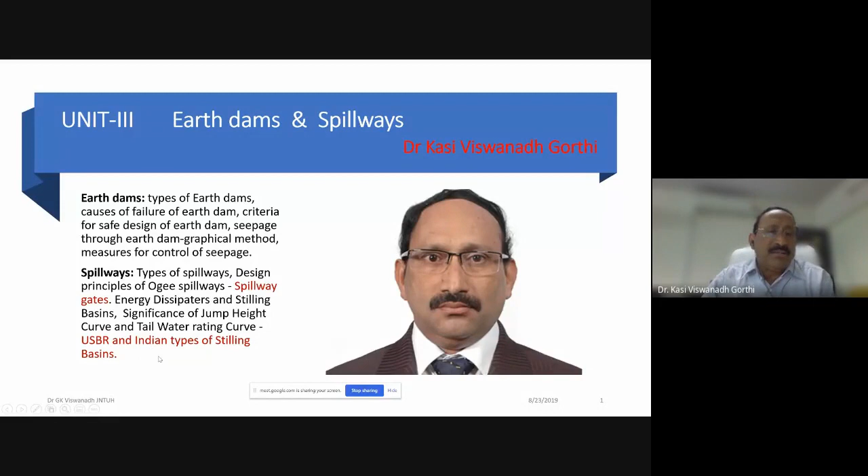So today's class, we will be concentrating on stilling basins, two types: Indian type stilling basin and USBR stilling basin, followed by spillway gates.

What is this stilling basin? It is a structure in which energy dissipation action is confined. This will be provided at the downstream portion of the spillway, may be extended for certain length. The phenomenon of hydraulic jump is basically used for dissipating the energy. It may be called hydraulic jump type stilling basin.

We may use certain auxiliary devices also, so as to contain the whole process of energy dissipation, confining to the total length of the stilling basin. We may use auxiliary devices like chute blocks, baffles, and sills. So these will act as the additional measure for controlling the jumps.

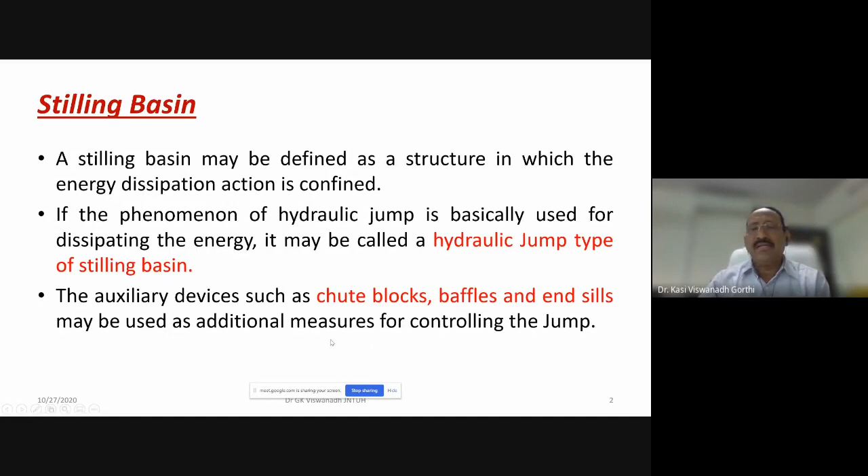Types of stilling basins: two varieties, USBR stilling basins and Indian standard stilling basins. Various types of stilling basins have been generalized for use in different types of works by various agencies. The design of these basins have been developed on the basis of long experience, also by conducting several model studies, keeping in view the protection obtained, consistent with economy also.

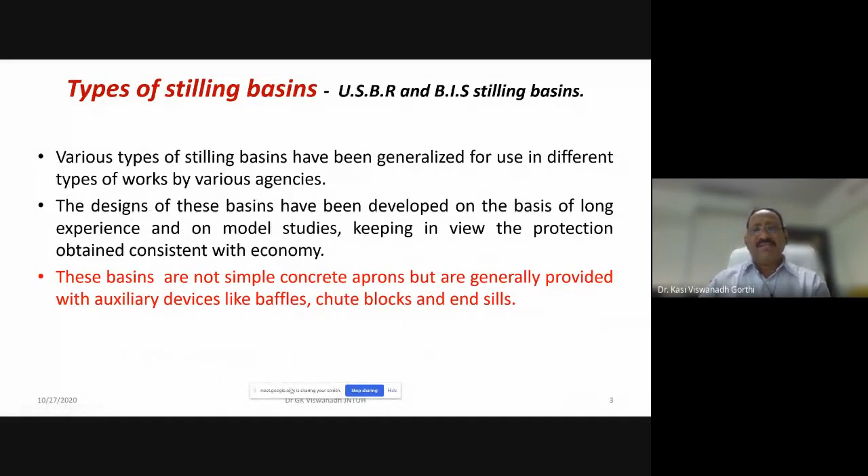These basins are not simple concrete aprons, but they are generally provided with certain auxiliary devices like chute blocks, baffles, and end sills. In the previous class, we have seen what are the chute blocks, what are the end sills, and what are the baffles which are provided on the apron at the downstream part of the spillway.

The USBR has standardized the stilling basins for different ranges of Froude numbers. Similarly, Bureau of Indian Standards has also standardized certain stilling basins for use under different conditions. Stilling basins 1 and 2 with a horizontal apron, and 3 and 4 with the sloping apron, have been standardized.

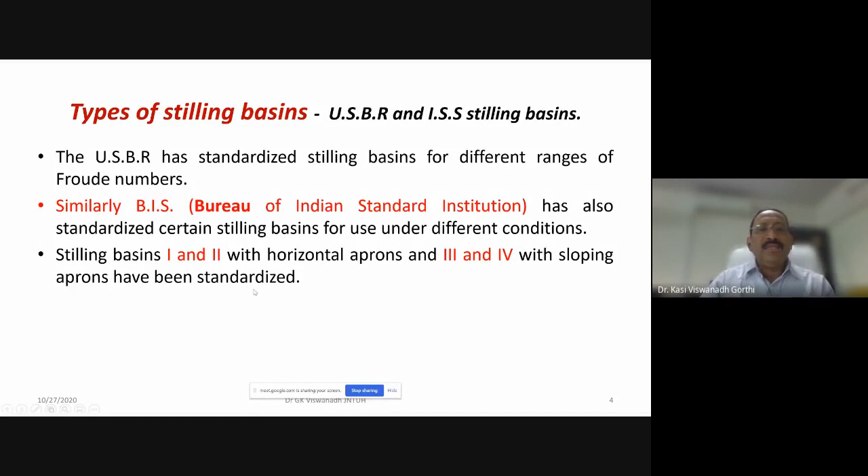Let us see both USBR and BIS stilling basins. Let us start with the USBR basins. USBR has standardized the stilling basin for different range of the Froude number.

Depending on the initial Froude number FR1 or F1, these have been finalized. USBR stilling basin 2 is recommended for use on large structures such as dam spillways and large canal structures, when the Froude number is greater than 4.5.

The length of the basin depends upon the Froude number, given here in the table. For Froude number 4, the length of the basin will be about 3.6 times the sequent depth in the hydraulic jump, Y2. Similarly for Froude number 6, it is 4 times Y2.

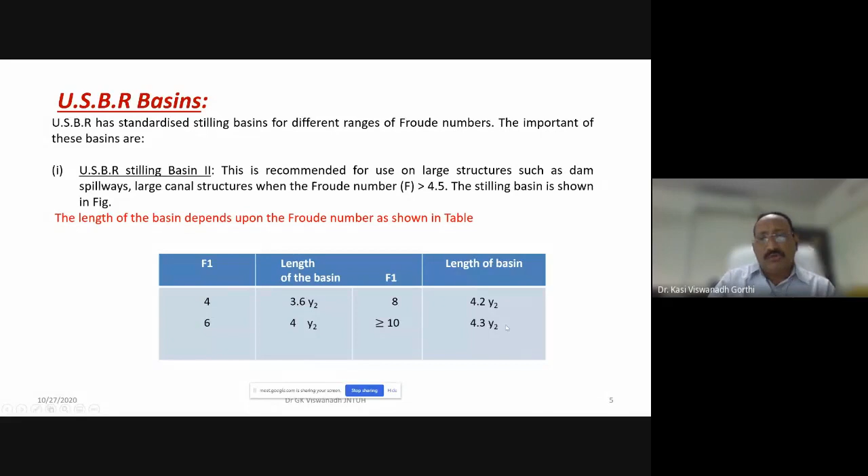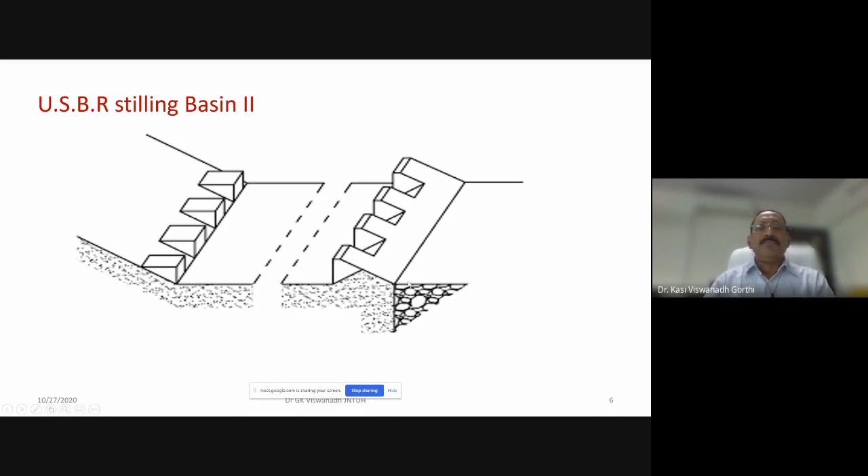For Froude number 8, it is 4.2 times Y2. And if the Froude number is greater than 10, 4.3 times Y2 would be the total length of the stilling basin. So this is the USBR stilling basin, extending for a length of 3.6 times the sequent depth to 4.3 times the sequent depth, depending on the initial Froude number.

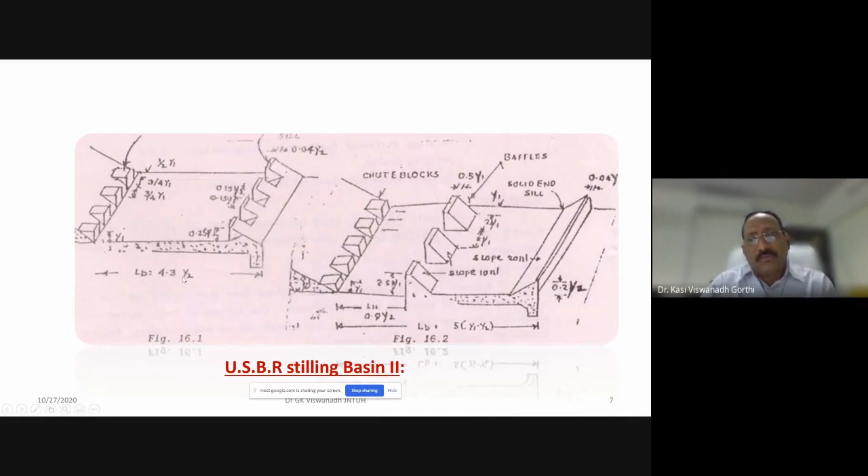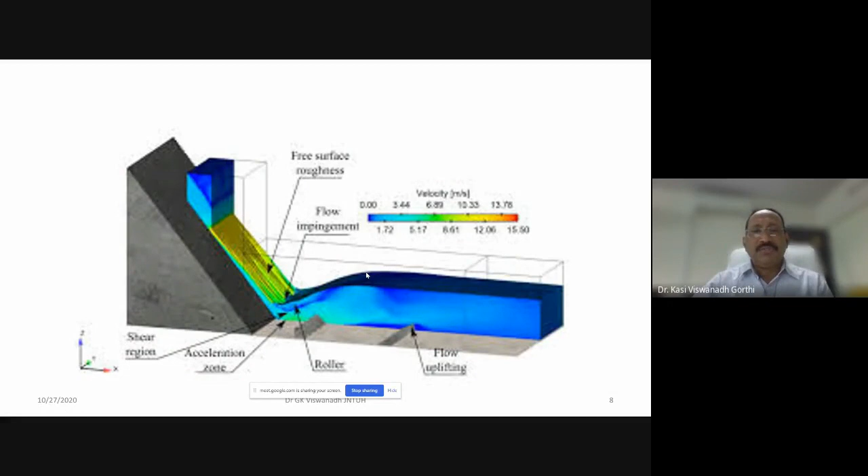So in this also you can see the total length of the stilling basin, 4.3 times Y2 for the stilling basin. This is USBR stilling basin 2. This figure also gives you how the length is finalized for the stilling basin.

USBR stilling basin 4 is used for the Froude number lying between 2.5 to 4.5. This basin is applicable only to rectangular cross sections. Large chute blocks are used to control the oscillating waves.

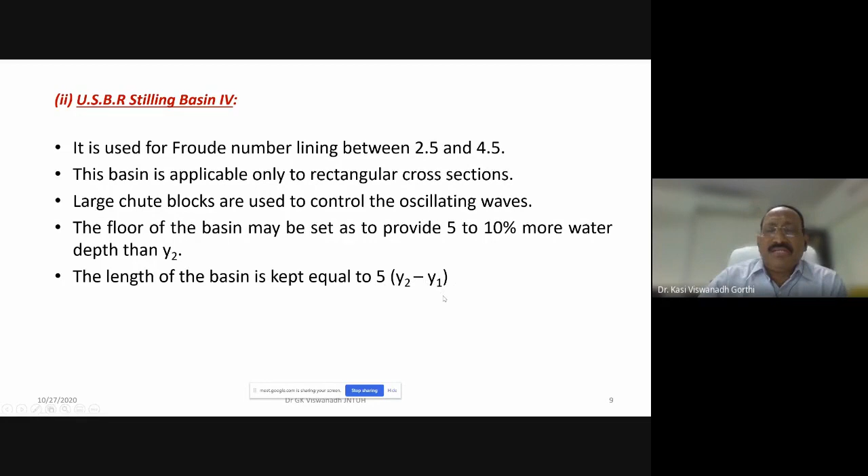The floor of the basin may be set so as to provide 5 to 10% more depth than Y2. The length of the basin is kept equal to about 5 times Y2 minus Y1, where Y2 is the sequent depth of the hydraulic jump and Y1 is the initial depth. So 5 times Y2 minus Y1 would be the length of stilling basin type 4.

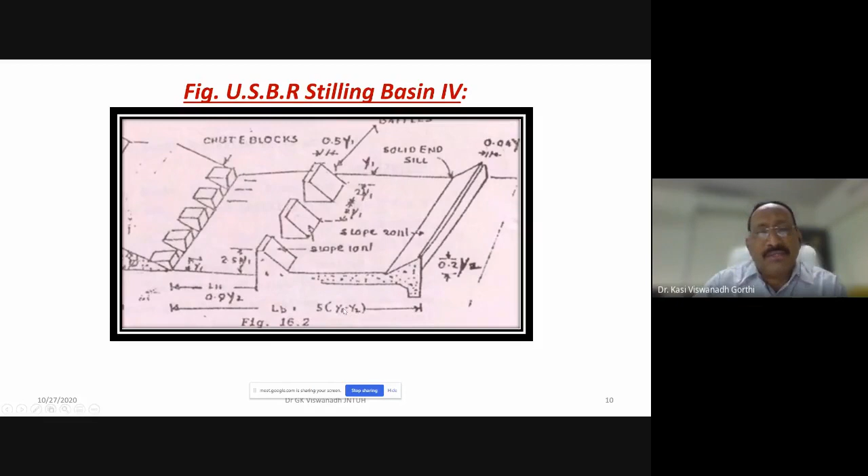So you can see here 5 times Y, the difference of Y2 and Y1. It is Y2 minus Y1, that gives you the total length of the stilling basin, LB. Coming to BIS stilling basins, the BIS laid down the criteria for the design of hydraulic jump type stilling basins for rectangular cross sections.

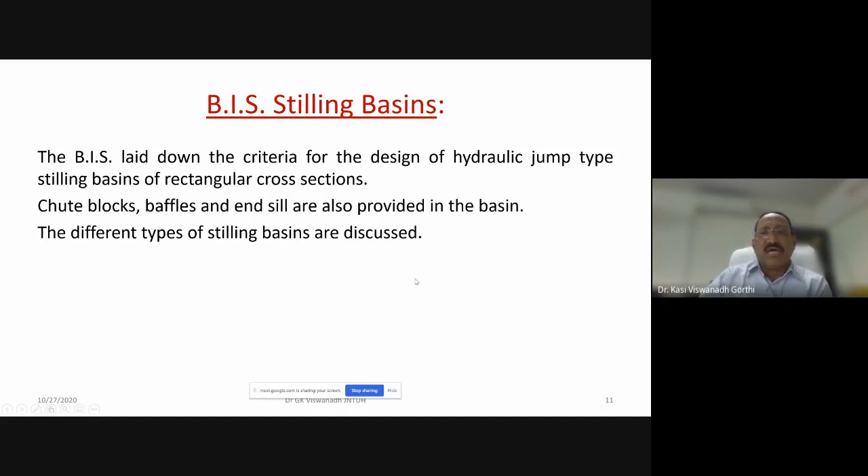Chute blocks, baffles, and sills are also provided in the basin, and different types, if you see, type 1 and type 2.

When the tailwater rating curve approximately follows the jump height curve, the hydraulic jump stilling basin with a horizontal apron provides the best solution for dissipating the energy. There are two types of stilling basins with a horizontal apron.

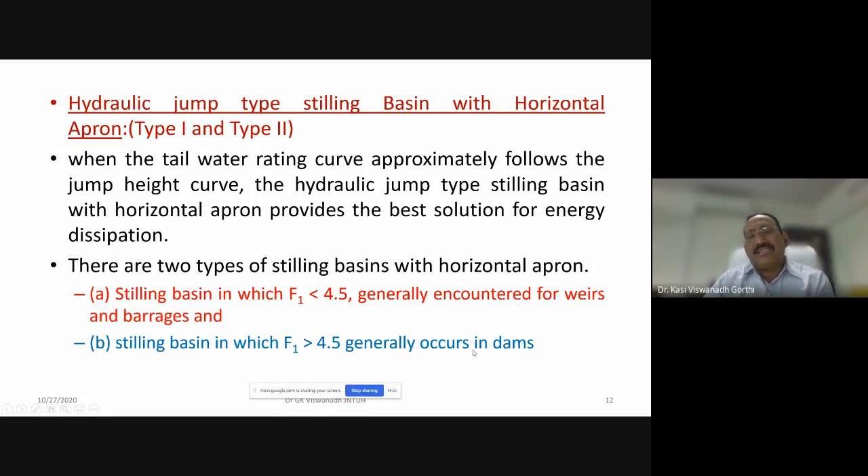One type, in which the Froude number FR1 is less than 4.5, is generally encountered for weirs and barrages. The other, in which the Froude number is greater than 4.5, generally occurs in dams. For stilling basin type 1, the basin floor, the basin length and floor level, and basin appurtenances are designed, like elevation of the floor.

Let HL be the head loss in the hydraulic jump, and Q is the discharge per unit width. Then you have the values of YC, Y1, Y2 - the initial and sequent depths - and YC is the critical depth.

The total head loss in the hydraulic jump type of stilling basin will be Y2 minus Y1 whole cube by 4 Y1 Y2, where Y1 and Y2 are the conjugate depths, initial depth and sequent depth. Also, having known the value of Y1, Y2 can be computed.

This is the very standard formula used while analyzing the hydraulic jump. Y2 will be equal to Y1 by 2 plus square root of Y1 square by 4 plus 2Q square by G Y1. And the critical depth YC will be equal to Q square by G, whole to the power 1 by 3, or else cube root of Q square by G.

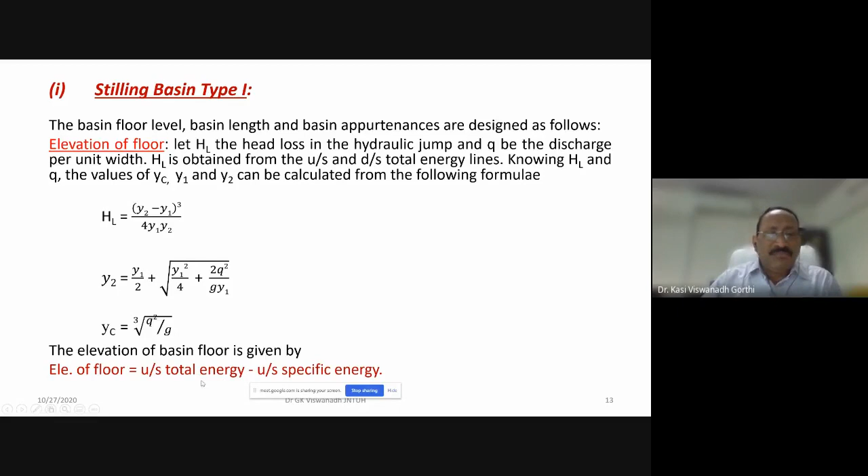The elevation of the floor is given by the upstream total energy minus the upstream specific energy. Total energy is the sum of Y plus V square by 2G plus Z, whereas the specific energy will be Y plus V square by 2G. So the elevation of the floor will be the difference between the total energy and specific energy.

Basin length and depth of the stilling basin type 1: generally, the floor should not be raised above the level required from Y2 consideration, because Y2 is the sequent depth, and only if it reaches the value of Y2 at the downstream portion will the hydraulic jump form. So if it becomes necessary to raise the floor due to site conditions, the same should not exceed 15% of Y2. The basin for this case should be provided with chute blocks and baffles.

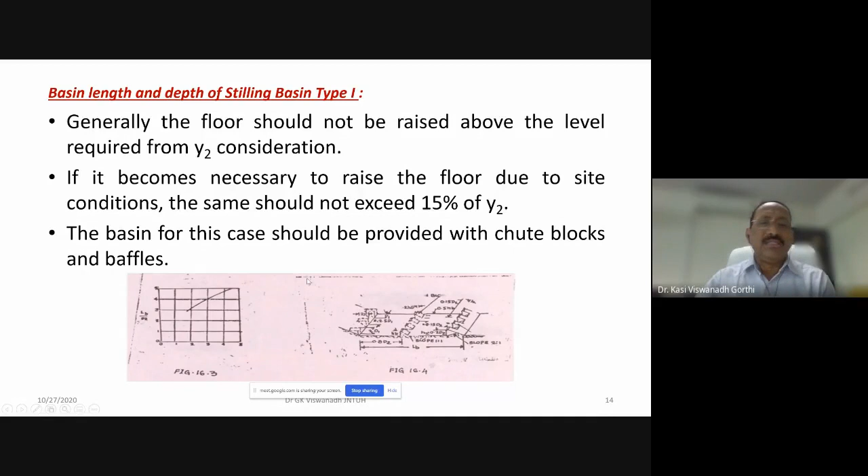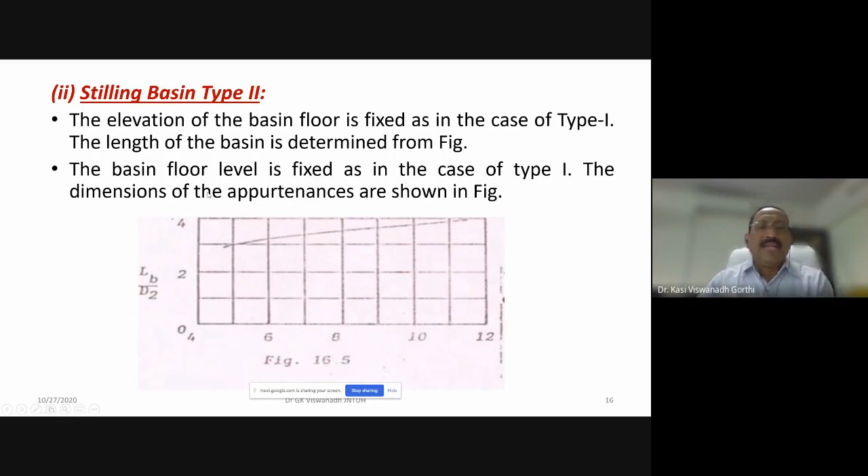The dimensions of the chute blocks, baffles, and sills are given in the figure, showing what the size should be. For type 2, the elevation of the basin floor is fixed as in the case of type 1. The length of the basin is determined from the figure, and the dimensions of the appurtenances are also given in the figure.

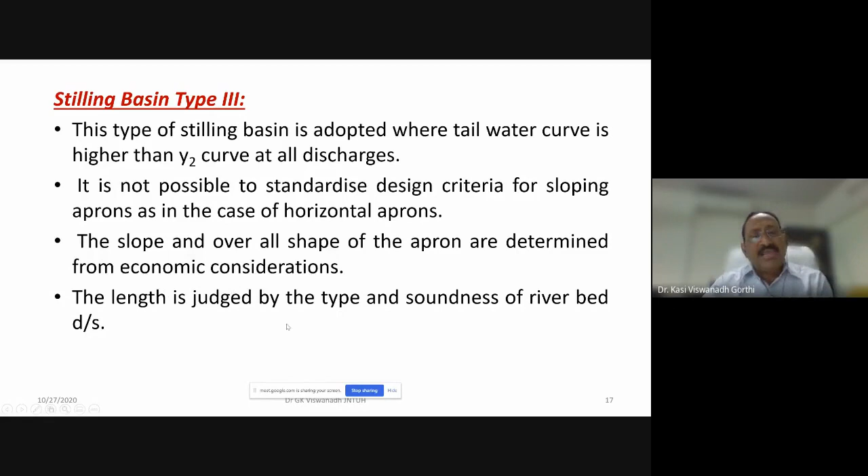Type 3 is adopted where the tailwater curve is higher than the Y2 curve at all discharges. It is not possible to standardize the design criteria for sloping aprons as in the case of horizontal aprons. The slope and overall shape of the apron are determined from economic considerations. The length is judged by the type and soundness of the riverbed downstream. The design criteria serve only as a guide in proportioning the sloping apron designs - much depends upon individual judgment also.

The basin should be supplemented by an end sill of height equal to 0.05 to 0.2 times the sequent depth Y2, with an upstream slope of 2:1 to 3:1 provided, as shown here.

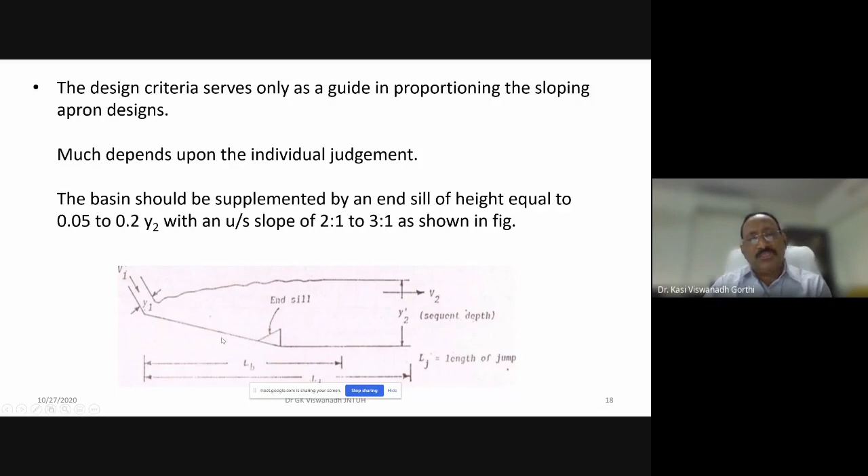Stilling basin type 4 is suitable for the case where the tailwater depth at maximum discharge exceeds Y2 considerably, but is equal to or slightly greater than Y2 at lower discharges. Like in type 3, it is not possible to standardize the design criteria. The design criteria laid down by ISI serves only as a guide in arriving at the appropriate dimensions, which depend mainly on practical considerations.

So we have seen about two basic categories of stilling basins: USBR stilling basin and Bureau of Indian Standard stilling basin.

In all these cases, hydraulic jump analysis is used to fix the length of the floor. Similarly, the elevation of the floor is fixed based on the difference between total energy and specific energy. The length of the floor is taken to be 5 times Y2 minus Y1 in the case of Bureau of Indian Standards.

There are slight differences from one type to another depending on the criteria used - you need to select the specific type of stilling basin for the case at hand. In most cases, it comes down to practical considerations to fix the dimensions: what should be the height, what should be the size, and where to provide the end sill, including its location and size. All these are based on practical considerations.

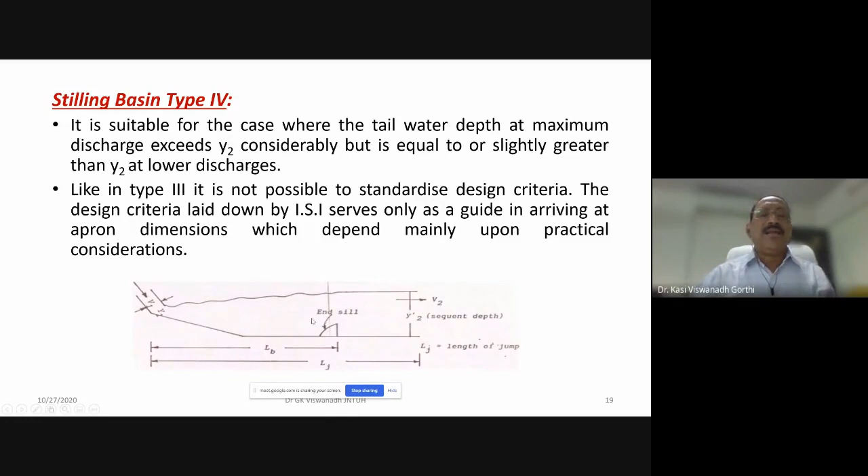Now we see about the spillway crest gates. We know that at the crest of the spillway, if a gate is provided, the full reservoir level can be increased. So we have two types of spillways: gated spillway and ungated spillway.

If an ungated spillway is provided, the crest level itself will be the FRL, and whatever water comes into the reservoir over and above that flows straight to the downstream portion. So the crest level will be equal to the full reservoir level in case of an ungated spillway. If a gate is provided, then the full reservoir level can be above the crest level, so you can store more water by providing gates. You can see here in this figure, several gates are provided.

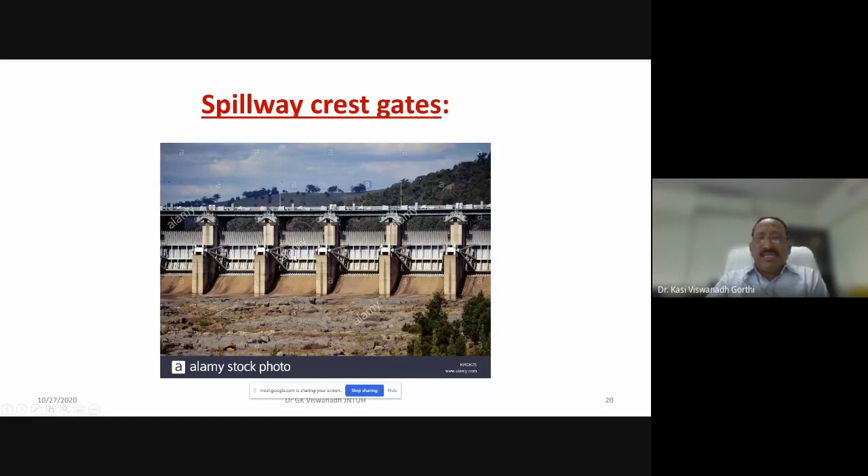The purpose of these gates is to increase the full reservoir level on the upstream side, which will enable more capacity of the reservoir. By installing the gates over the spillways, additional storage can be made available, especially during low water flows. During periods of low water, the water joining the reservoir can be stored by closing these gates. During flood times, these gates are raised so the full spillway capacity can be used and the water can be safely discharged to the downstream portion.

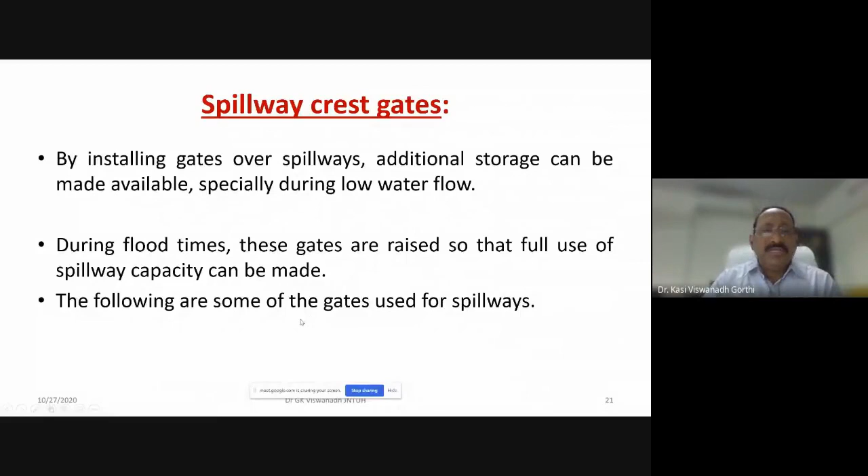So we discuss some types of spillway crest gates. Look at this figure, and you get a clear picture of the gates which are provided, above and over the crest level of the spillway. This is the crest level of the spillway.

By providing these gates, the water level on the upstream side can be increased. For example, during a low flow period into the reservoir, the gates will be closed, and the incoming water can be stored without letting it off to the downstream portion. During the flood period, the gates can be opened — the position of the gate will not be here, it will be somewhere here, opened. Thereby, the water can be safely disposed over the surface of the spillway to flow downstream. This happens during the flood period.

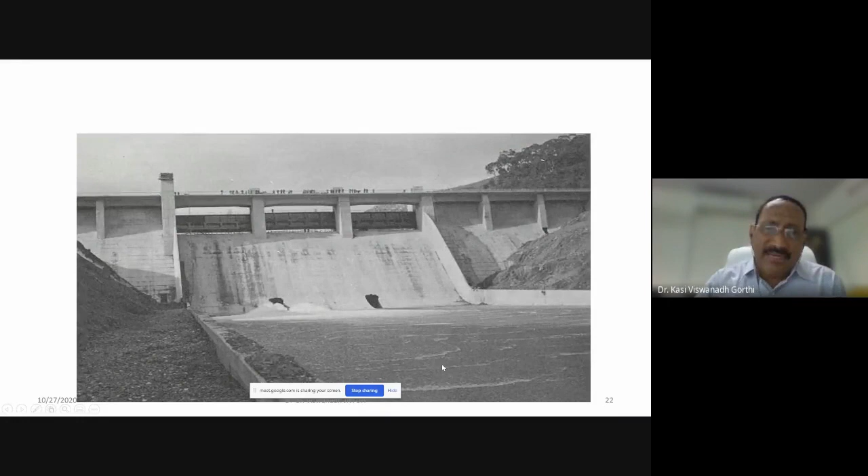A small video here to understand about the spillway gates. Please go through this.

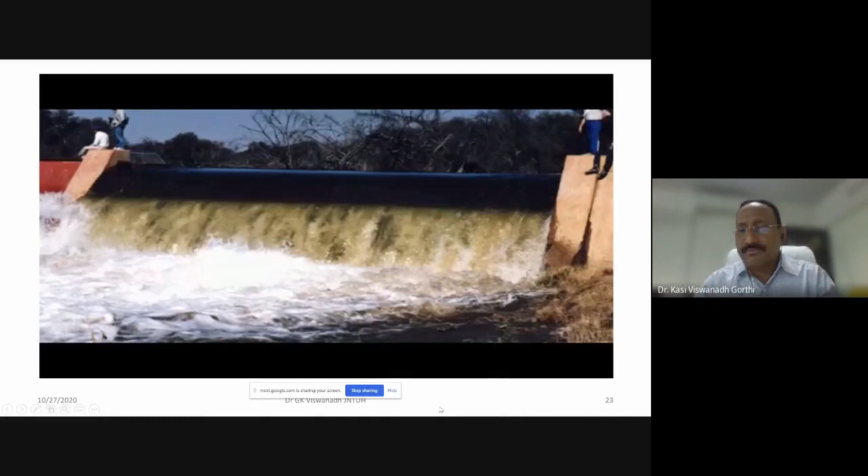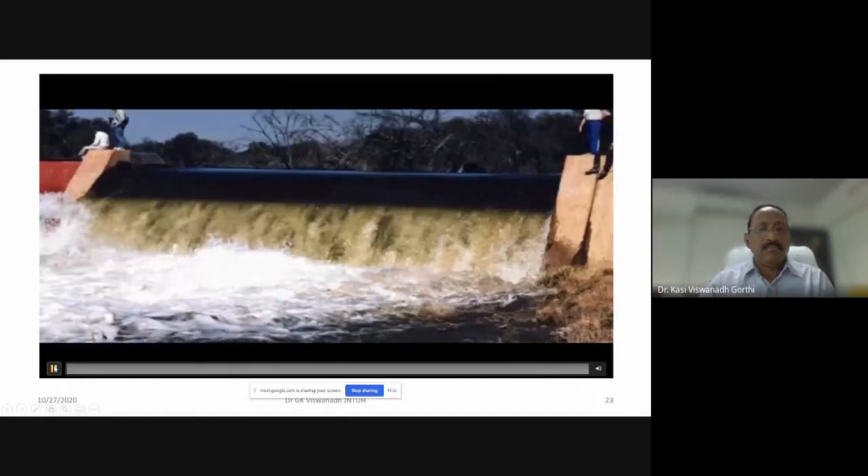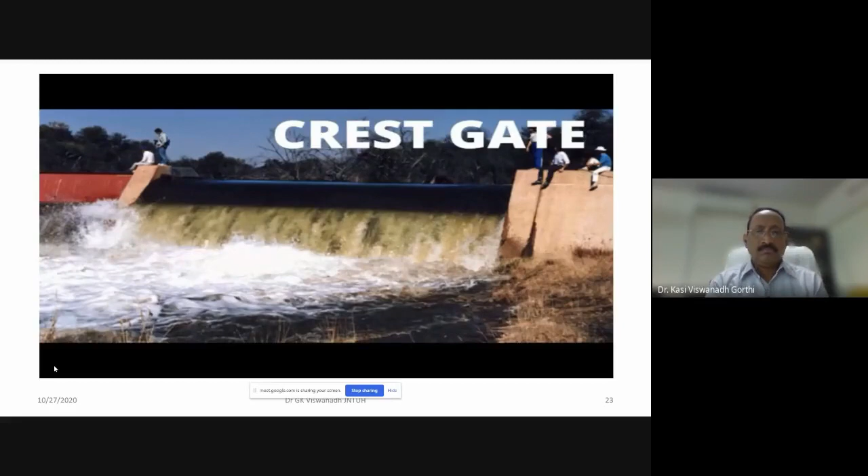Crest gate is fitted to the top of a river weir or dam to provide additional storage as well as minimizing upstream flooding. It is totally automatic, not requiring any electromechanical intervention.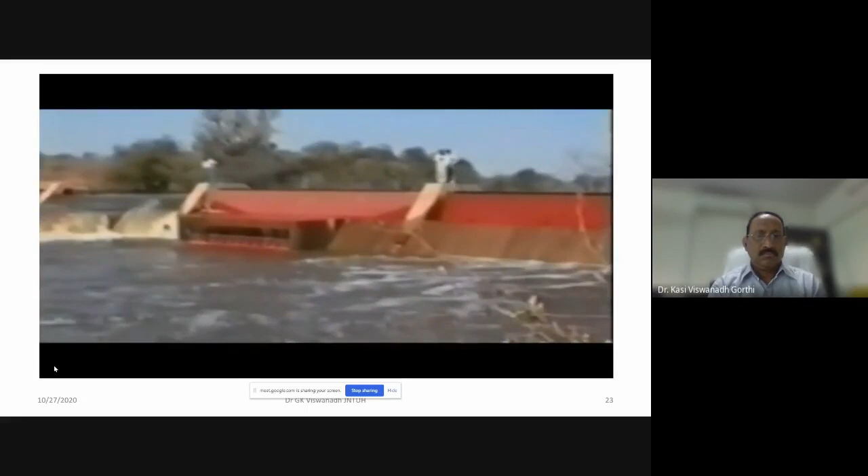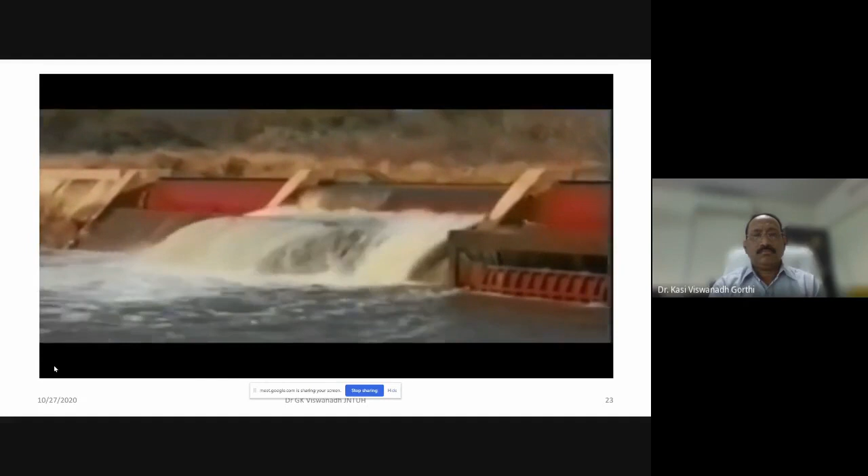The crest gate is closed, with the buoyancy tank empty, to float on the water and increase the water level in the dam. As the water level rises due to a flood, water decants into an inlet weir which feeds the water through hollow ducted radial arms into the buoyancy tank. The tank slowly fills, and as the weight of water in the buoyancy tank exceeds the flotation on the tank, the crest gate rotates downwards to open.

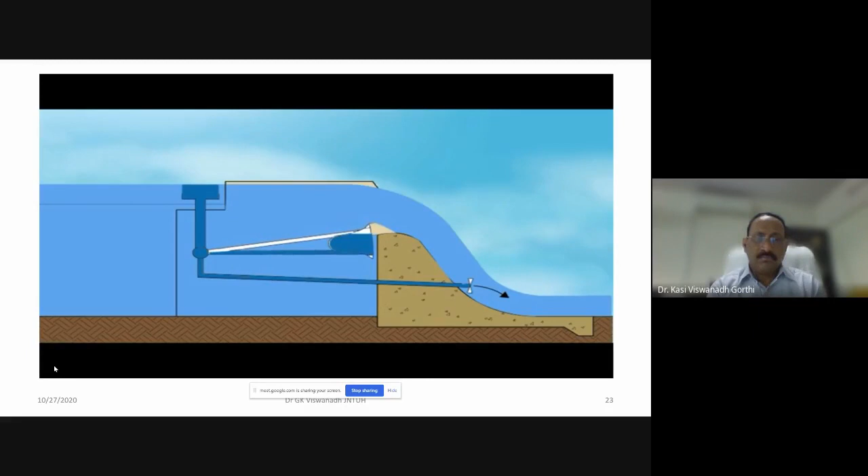The spillway then freely discharges the flood waters over the spillway, taking with it large objects carried down by the flood waters. As the flood abates and the water level subsides, water flowing into the inlet weir reduces and then stops flowing into the flotation tank.

The water in the tank is constantly discharging through discharge pipes downstream of the spillway. This slowly decants water out of the tank to reduce the ballast weight, and the crest gate floats up to its fully closed position. The crest gate therefore opens automatically to pass flood waters and closes automatically to retain the full supply level.

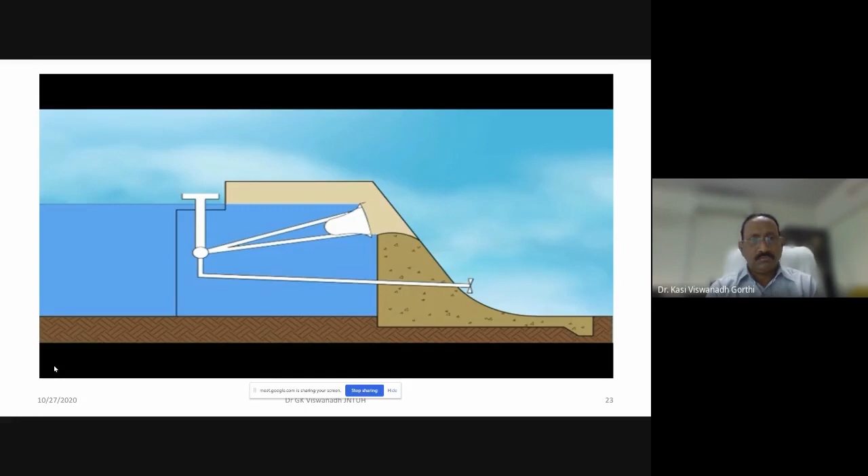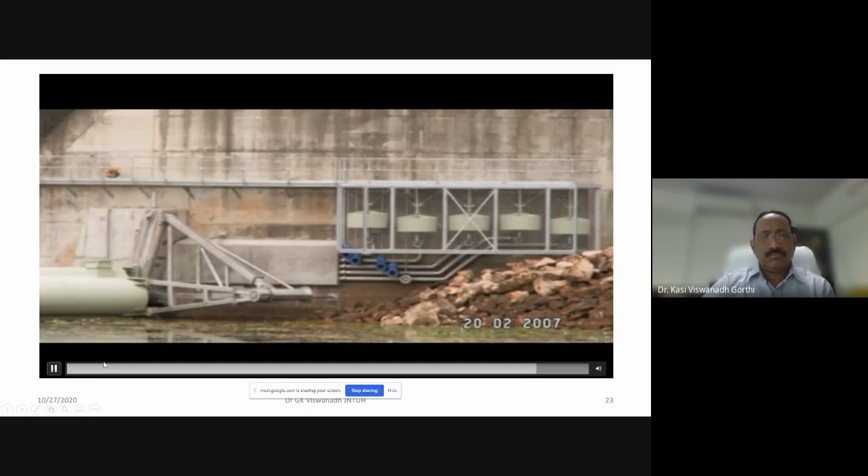By setting the inlet weirs at different water levels, the crest gates can open in sequence in response to rising water levels and thereby effectively pass the incoming flood. The combination of crest gates and scour gates on river weirs makes an effective and flexible structure to minimize sedimentation and flotsam behind river weirs.

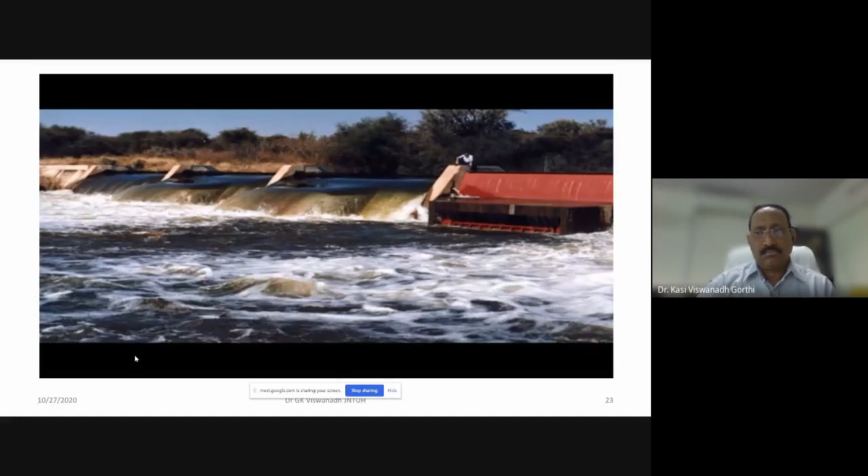The crest gate — so we have seen in this video how automatically the gates are getting opened and closed using the buoyancy principle. Based on this, if the floodwater is increasing, the crest gate moves down to enable more water to flow to the downstream portion.

On the other hand, as the water level recedes in the reservoir, the crest gate moves up because of the simple buoyancy principle, allowing the water to store on the upstream side. So the entire operation of the crest gate is fully automated.

Now we see the types of crest gates — dropping shutters or permanent flash boards. This is one type of crest gate, the dropping shutter. They are something like wooden panels provided so that they obstruct the flow and the water is stored on the upstream side.

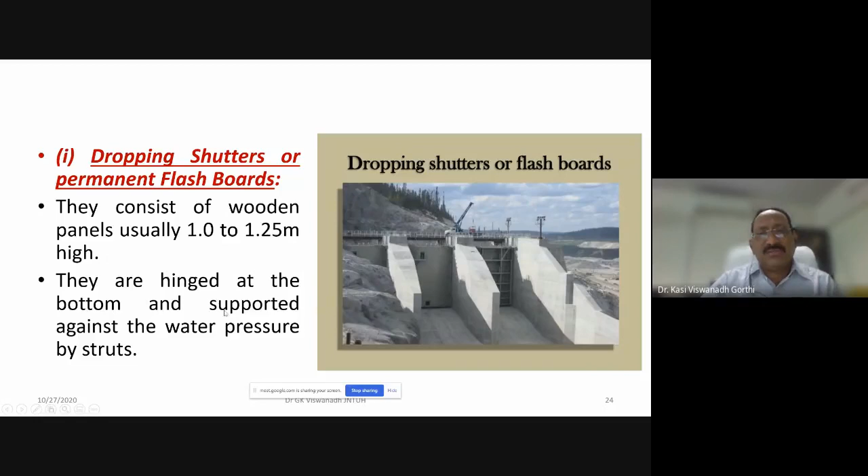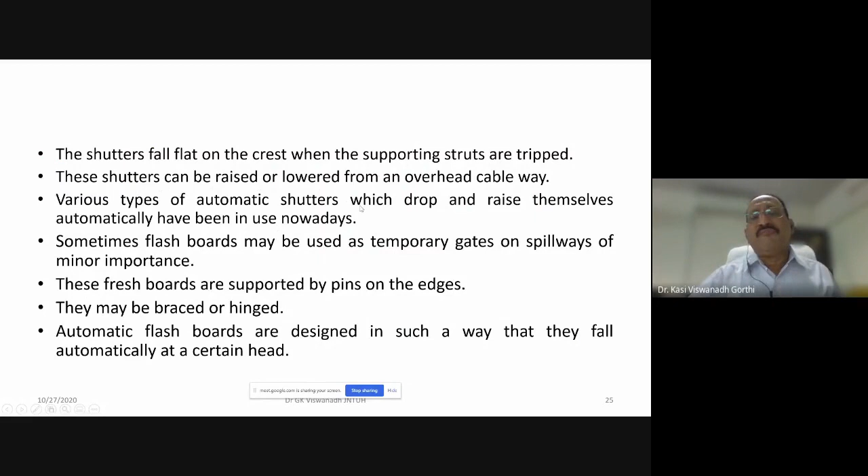They consist of wooden panels, usually 1 to 1.25 meters high. They are hinged at the bottom and supported against the water pressure by struts. These are the dropping shutters — they fall flat on the crest when the supporting struts are tripped, and can be raised or lowered from an overhead cable way. Various types of automatic shutters which drop and raise automatically are in use nowadays.

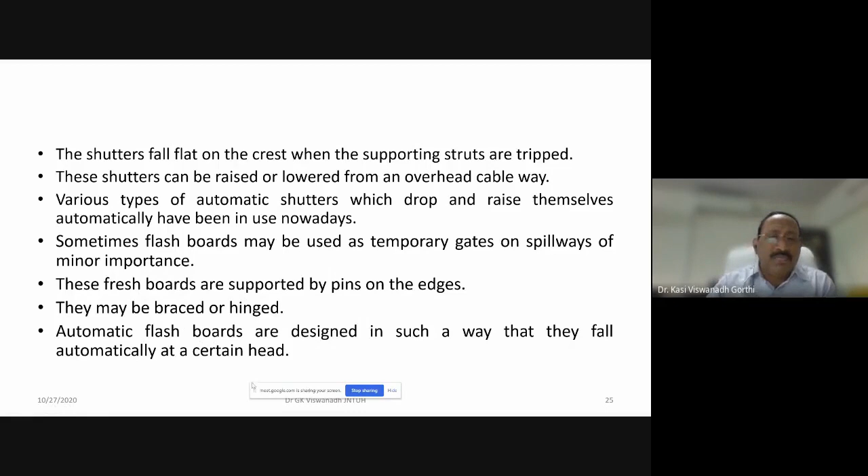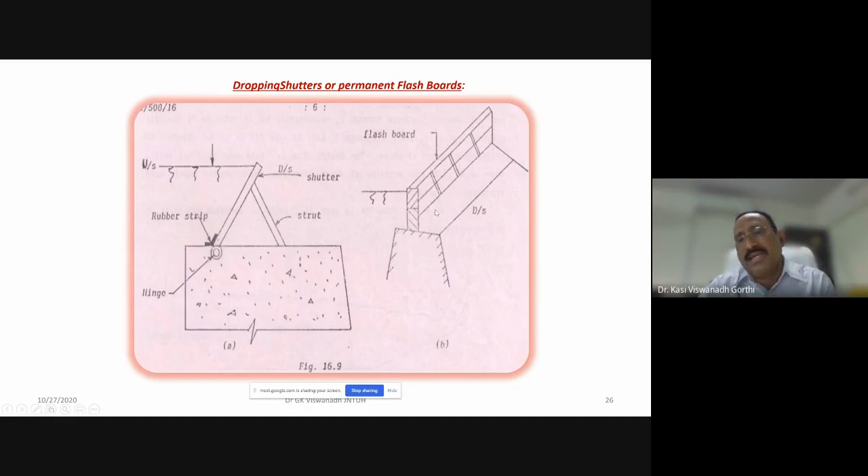Sometimes flash boards may be used as temporary gates on spillways of minor importance. These flash boards are supported by pins on the edges. They may be braced or hinged, and automatic flash boards are designed to fall automatically at a certain head. These flash boards, like wooden shutters, are held up at this position. As and when required, they are dropped so that they fall through the groove and the water level on the upstream side can rise.

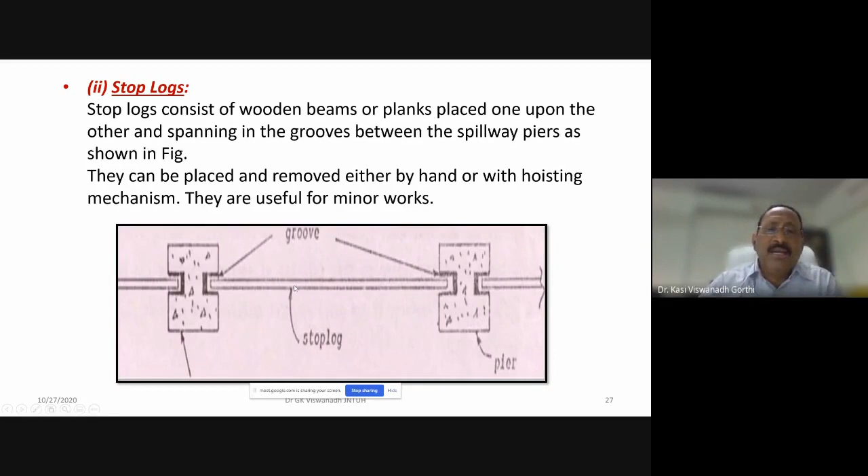So this is how the stop logs work. You can see a number of stop logs are provided here. You have a concrete block here, something like a pier, and in between these two piers a groove is there. In this groove, these stop logs one over the other are placed, so they can be dropped one after the other, up to whatever is the maximum water level required.

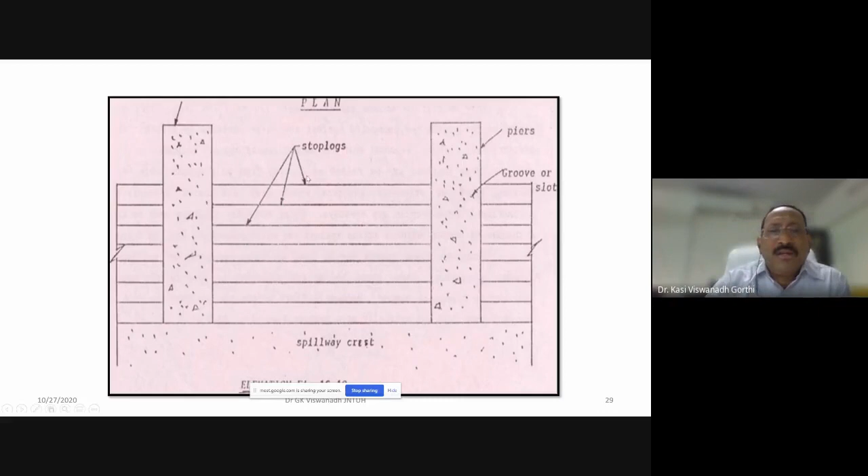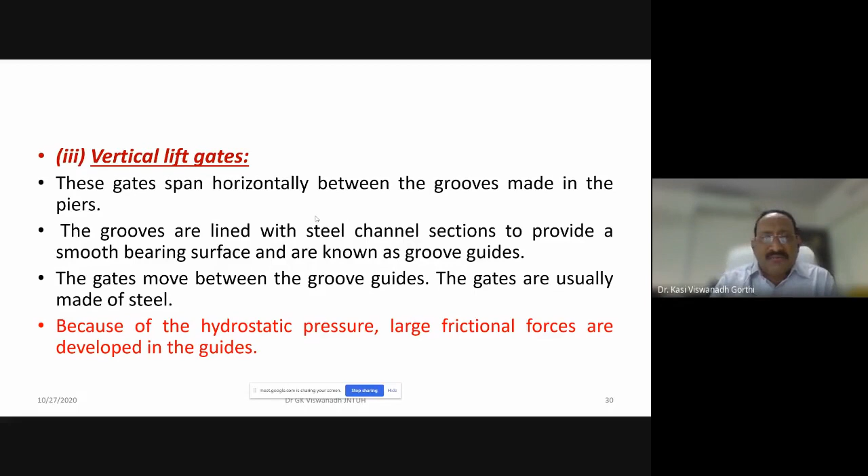Third one is the vertical lift gates. These gates span horizontally between the grooves made in the piers. The grooves are lined with steel channel sections to provide a smooth bearing surface and are known as the groove guides. The gates move between the groove guides and are usually made of steel. Because of the hydrostatic pressure, large functional frictional forces are developed in these guides.

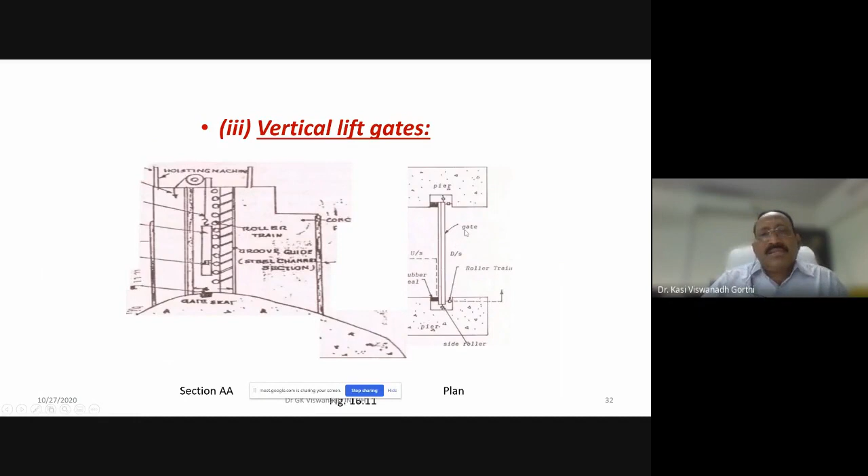Radial gates is the fourth category. A radial gate has a curved water supporting face made of steel, in the shape of a sector of a circle, properly braced by steel framework, which is pivoted on a horizontal shaft called a pin. The pins are anchored in the downstream portion of the spillway pier, and the gate rotates about the fixed horizontal axis.

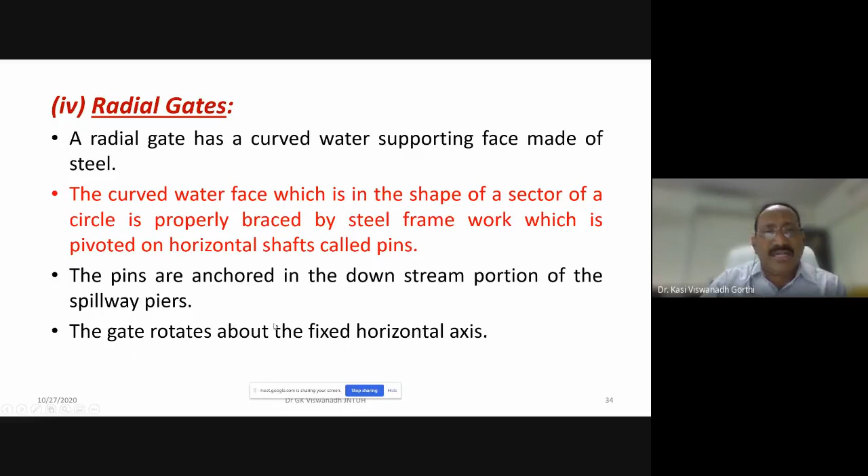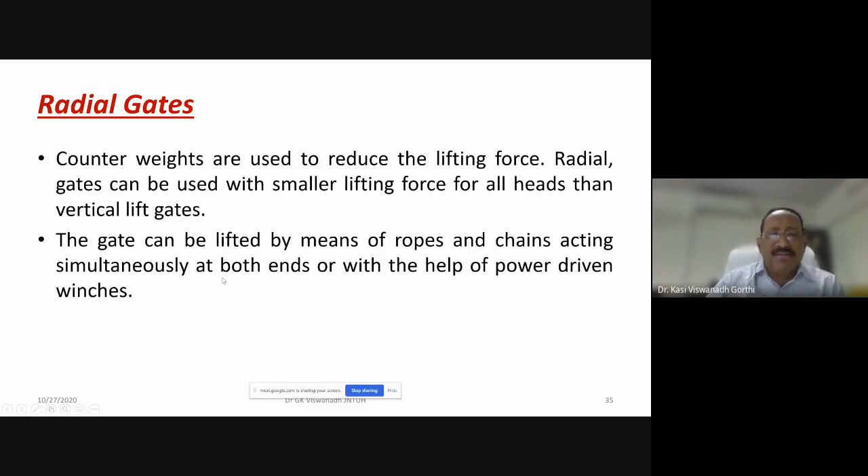Counterweights are used to reduce the lifting force. Radial gates can be used with a smaller lifting force for all heads than the vertical lift gates. The gate can be lifted by means of ropes and chains, acting simultaneously at both ends, or with the help of power-driven winches. So you have a radial gate here.

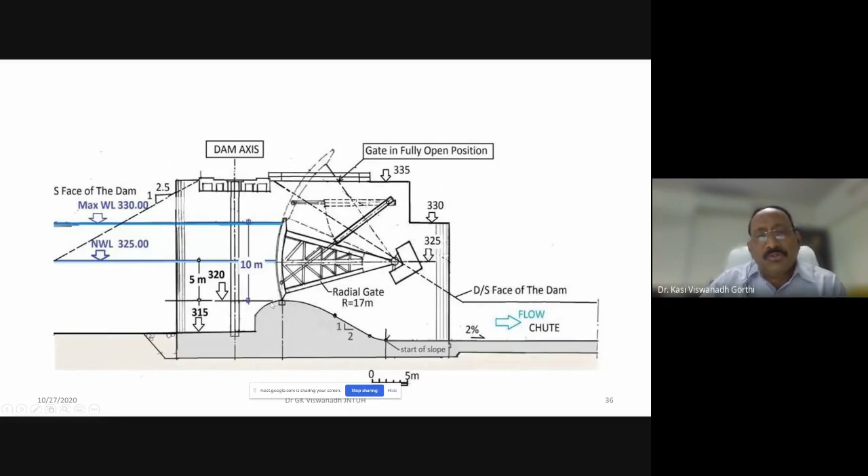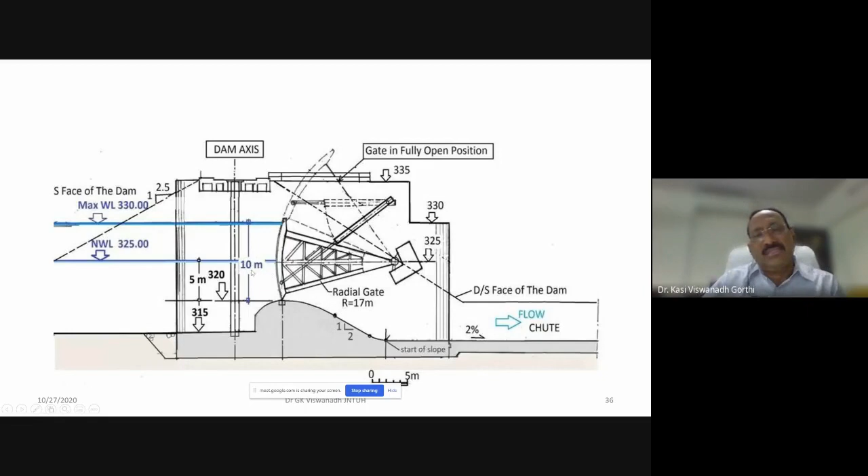So this is the crest level of the spillway. Over and above the crest level of the spillway, the water may be stored even to a level of about 10 meters here. So this is how the radial gates will be provided, over the crest of the spillway.

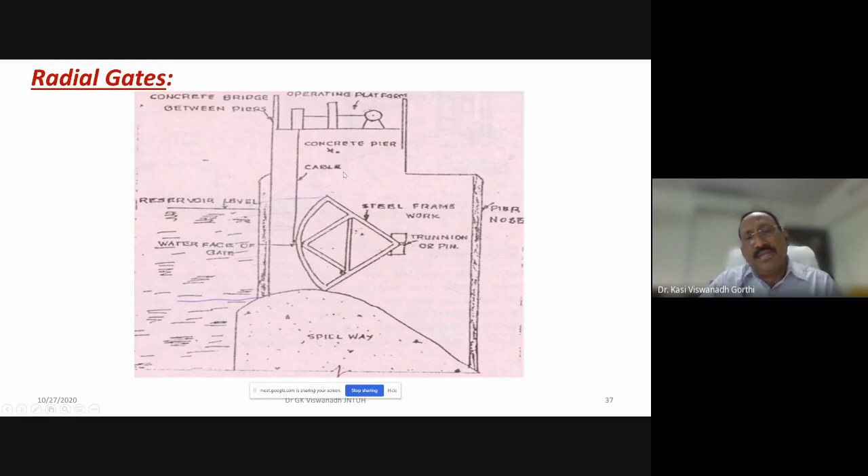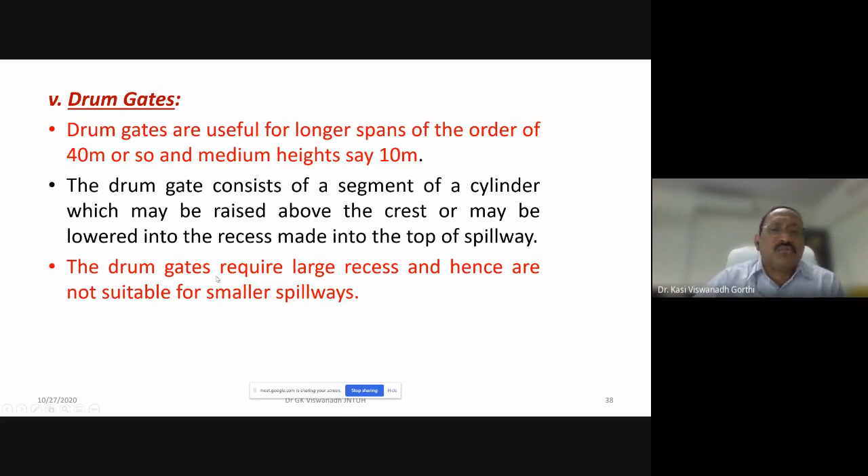Fifth one is the drum gate. Drum gates are useful for longer spans of the order of 40 meters or so and medium heights, say about 10 meters. The drum gate consists of a segment of a cylinder which may be raised above the crest or may be lowered into the recess made into the top of the spillway. Drum gates require large recesses and hence are not suitable for smaller spillways.

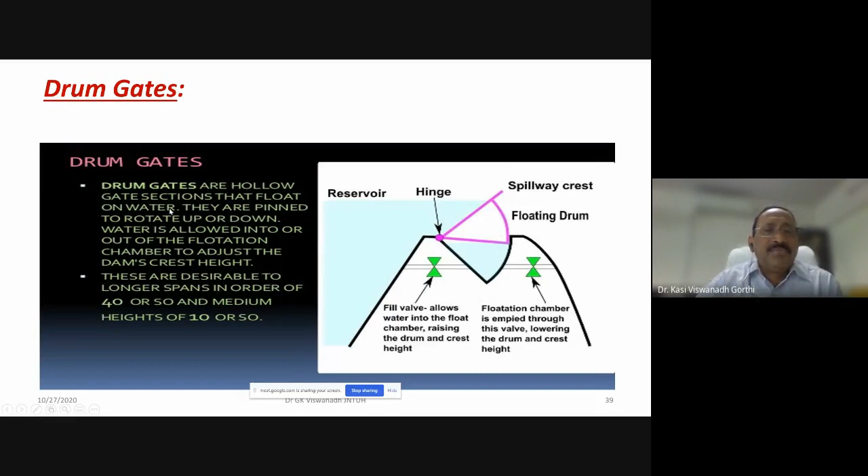So this is a drum gate. Instead of directly moving over the crest, you may observe here a floating drum moving towards the axis of the spillway crest. So you have a hollow gate section that floats on the water in the case of a drum gate. This is how a drum gate would be provided.

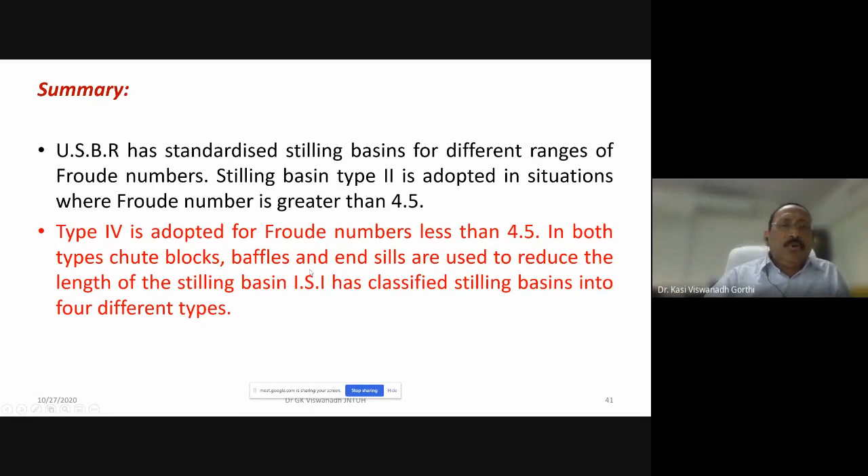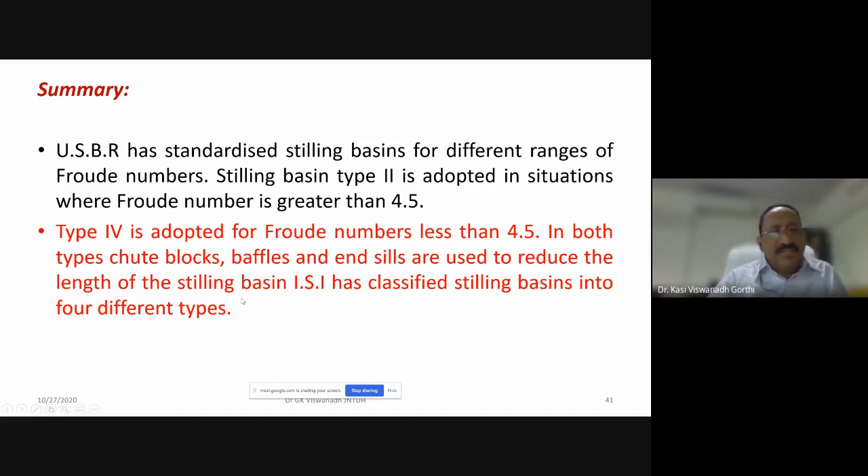To conclude, USBR has standardized the stilling basins for different ranges of Froude numbers. Stilling basin type 2 is adopted where the Froude number is greater than 4.5, and type 4 is adopted for Froude number less than 4.5. In both types, we use chute blocks, baffles, and end sills, which are used to reduce the length of the stilling basin.

ISI has classified the stilling basins into 4 different types, BIS type 1, 2, 3, and 4. Type 1 and Type 2 are used with horizontal apron, while Type 3 and Type 4 are used with sloping aprons. Spillway crest gates are divided into other types like dropping shutters, stop logs, vertical lift, radial and drum gates. The last three are used for large structures.

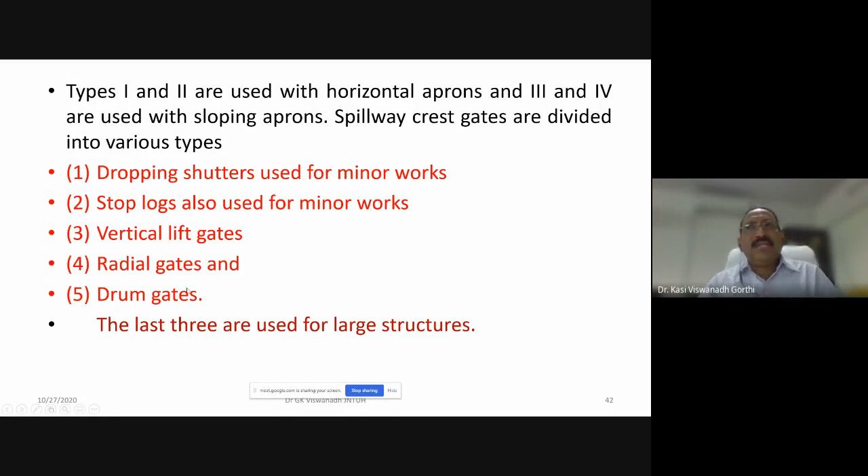So we have seen basically about the spillway crest gates and the stilling basins which are proposed by USBR as well as the Bureau of Indian Standards. A small experimentation has been carried out by one of the researchers.